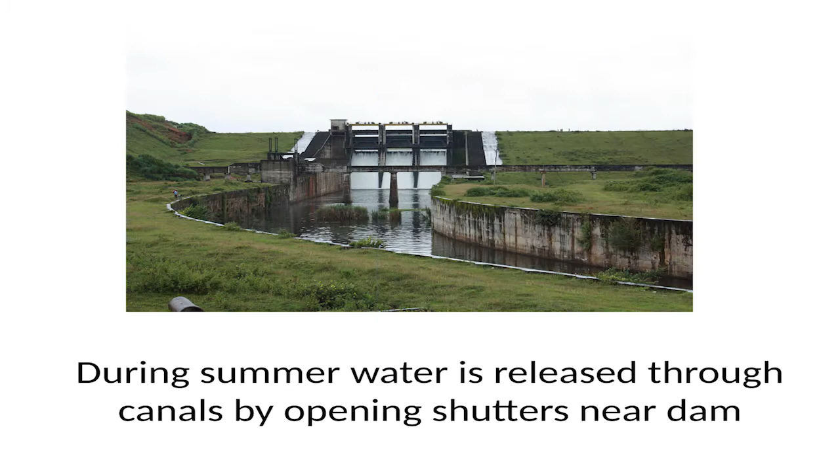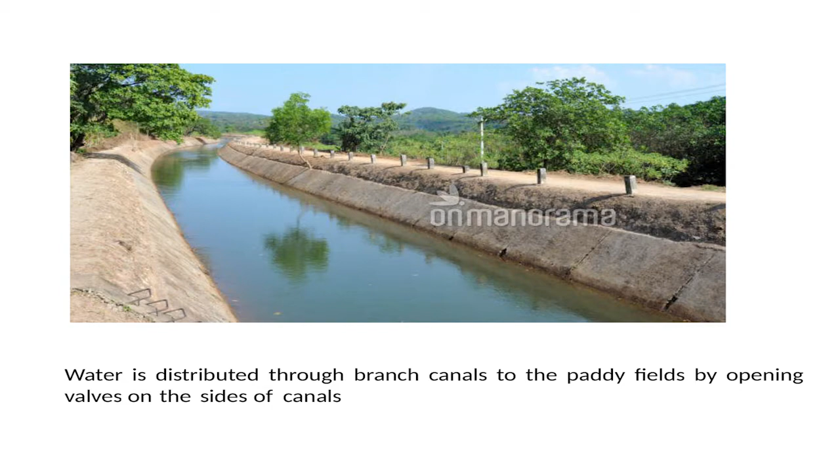In rainy season, water is collected in tanks. During summer, water is released through canals by opening shutters near the dam. Water is distributed through branch canals to the paddy fields by opening valves on the sides of canals. The valves are opened and closed without taking any feedback. To study this problem, we met farmers in Palakkad district.

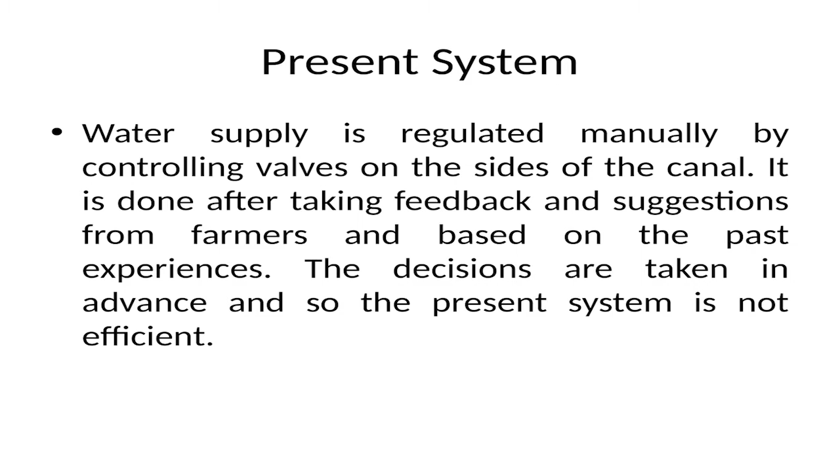According to the farmers, the problem they face is that water is supplied to a large area without assessing the soil condition. We collected the details from the present system. Water supply is regulated manually by controlling valves on the sides of the canal. It is done after taking feedback and suggestions from farmers and based on past experience. The decisions are taken in advance, so the present system is not efficient.

We have proposed an innovative system. Paddy field is divided into sections of the same level. Sensors are used to monitor soil conditions and they are connected to an electronic control device in each section. It regulates the water flow by controlling the valve based on the input from sensors. This system saves precious water, especially in the summer. The proposed system is more efficient compared to the present system.

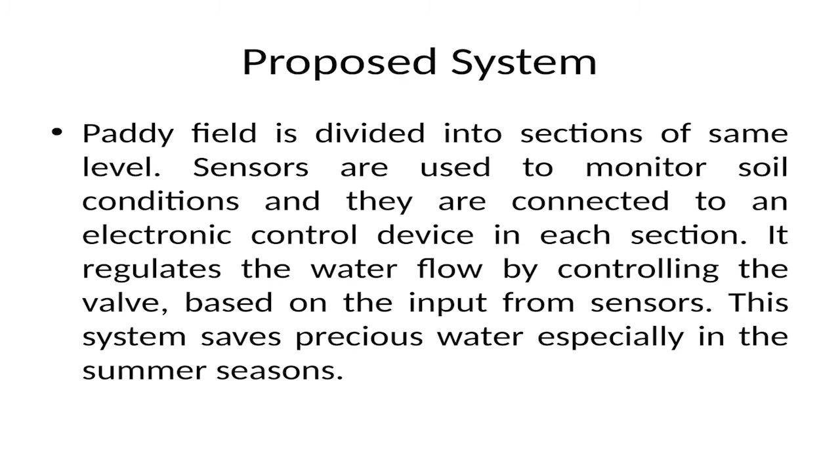This is the block diagram of the proposed system. The system consists of 2 sensors, an electronic control device and a valve. The principle of the proposed system is that we have to sense the dry and wet conditions of the soil in real time. Water is supplied to the field when soil is dry and water supply is to be stopped when the soil is wet. Also, the water supply is to be regulated based on temperature of the atmosphere.

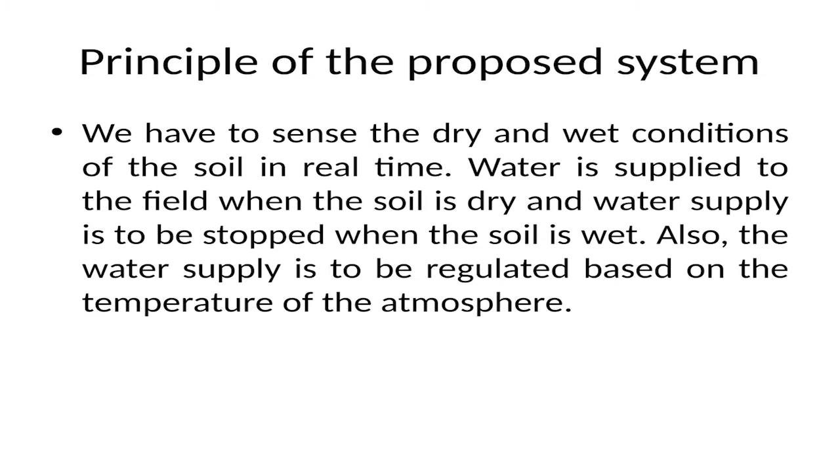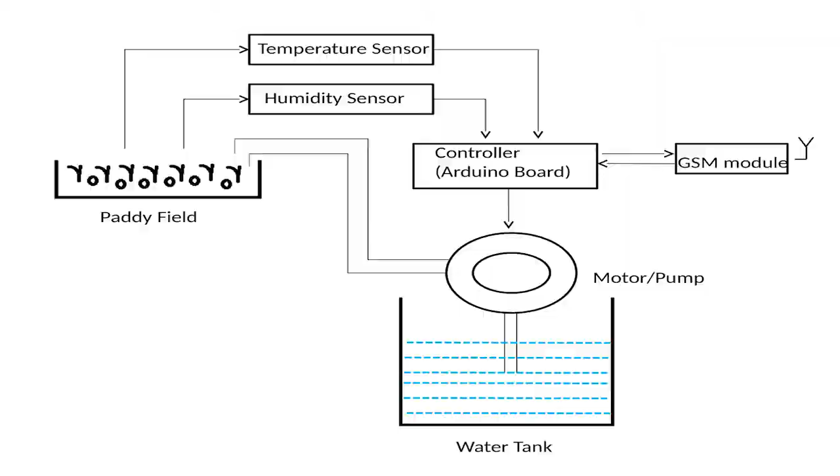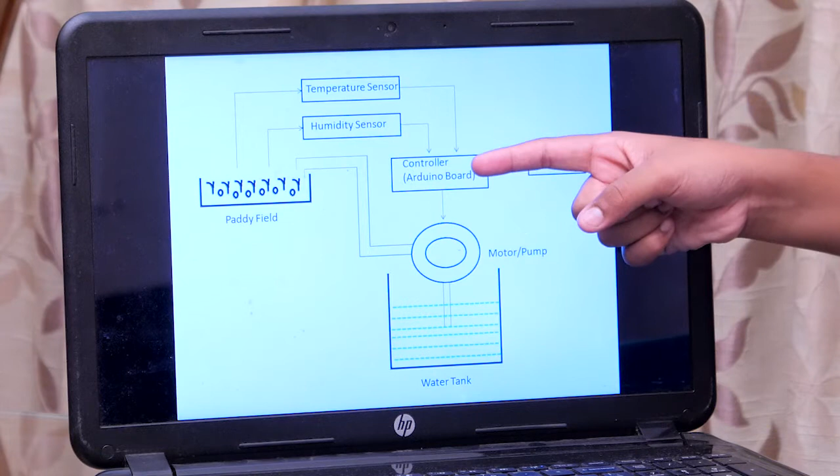To verify the effectiveness of the system, we have developed a prototype of automatic irrigation control system using the facilities available in the Atal Tinkering Lab of our school. The prototype consists of a small irrigated area representing the paddy field, humidity sensor which senses the wet and dry condition of the soil, temperature sensor which senses the atmospheric temperature, water tank where water is stored, motor pump arrangement for the controlled supply of water to the field, Arduino board, an electronic device which acts as a control to start and stop the motor, and GSM module for wireless communication.

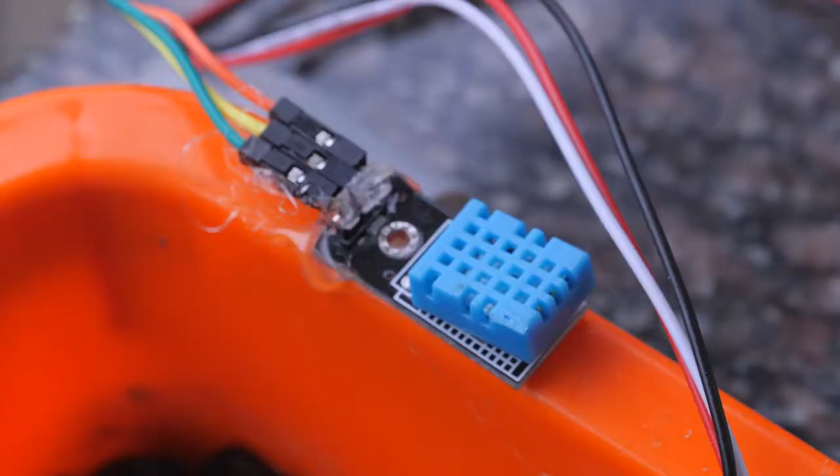Now we will show the working of the prototype. 1 temperature sensor and 1 humidity sensor. One senses heat and the other moisture. When sun is bright, sensor 1 opens water supply. When it rains, sensor 2 closes the water supply. An electronic device receives signals and sends commands to control a motor to regulate the water supply.

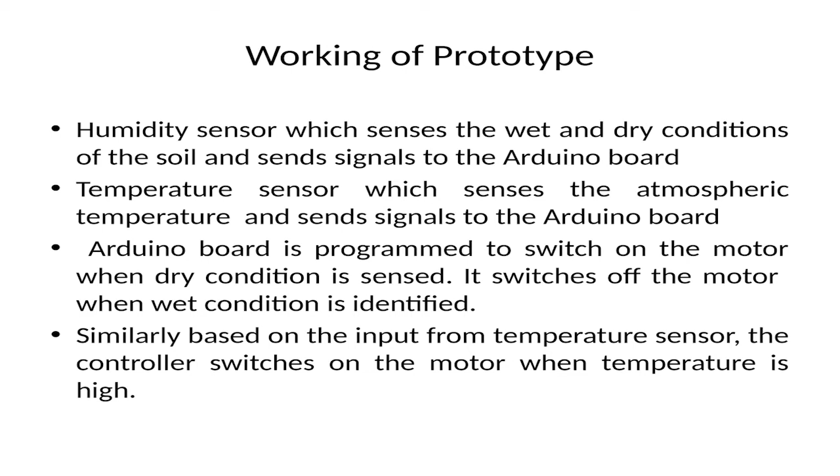Humidity sensor, which senses the wet and dry condition of the soil and sends signals to the Arduino board. Temperature sensor, which senses the atmospheric temperature and sends signals to the Arduino board. Arduino board is programmed to switch on the motor when dry condition is sensed. It switches off the motor pump when wet condition is identified. Similarly, based on the input from temperature sensor, the controller switches on the motor when temperature is high.

Developments that are effected on the prototype: GSM module is connected to the Arduino board. This has helped to establish communication between the system and farmers. Farmers can get various data regarding the operation of the system through SMS. Farmers can remotely control the set values of operation of motors. The period of operation of the motors can be monitored, thereby the total quantity of water flow can be calculated.

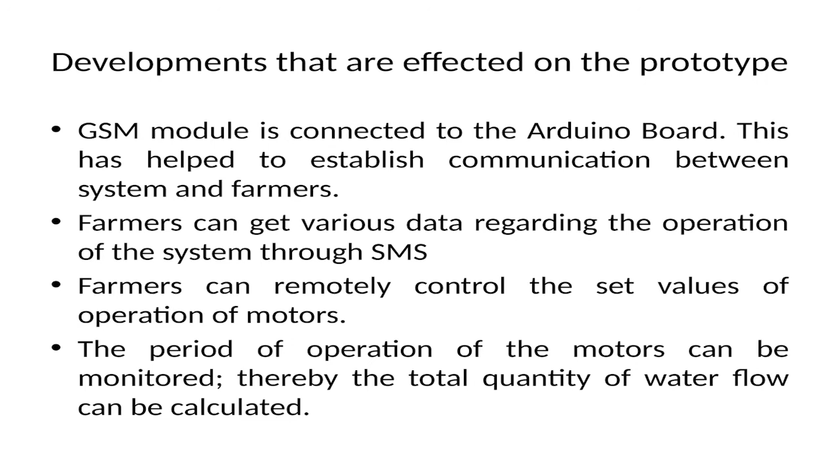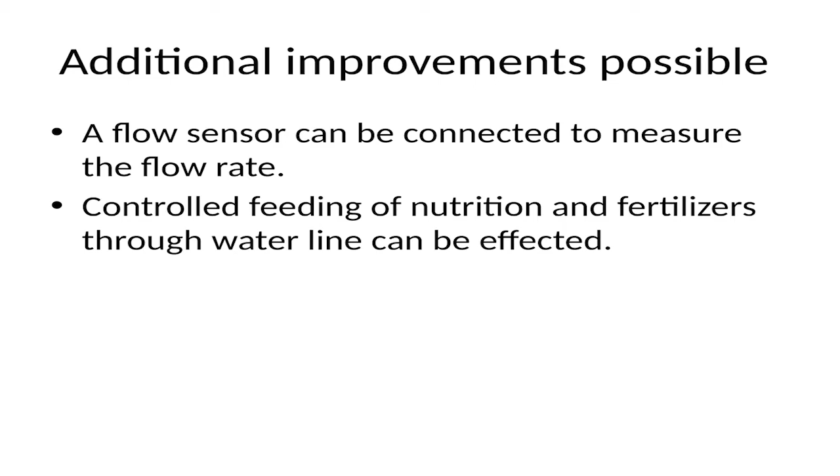Additional improvements possible are: a flow sensor can be connected to measure the flow rate. Controlled feeding of nutrition and fertilizers through water line can be effected. Future possibilities are: new trends and systems in agriculture are implemented to maximize the production, reduce wastage and optimize use of water, fertilizers, etc. The introduction of electronics in agriculture for remote monitoring, creating controlled climatic conditions, water line feeding of nutrition have produced encouraging results.

Many large companies such as TCS, UST Global are engaged in activities in agriculture integrated with computer and electronics in their research on Internet of Things. We hope our system can be adapted with necessary modification by Irrigation Department, agriculture research institutions and industries.